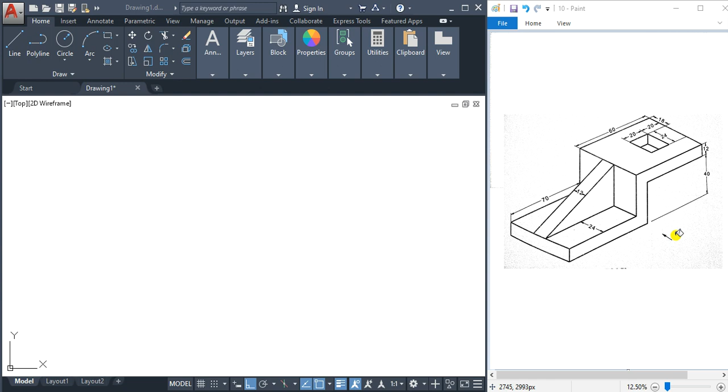Now we have to draw orthographic projections of this object. The arrow indicates the front view direction. So in this direction, the surfaces which are visible are this surface, and also a hole is there, so that hole also we have to represent. In this direction, the hole is there, but it is not visible, so we'll indicate with dotted lines here.

So let us draw the front view of this object.

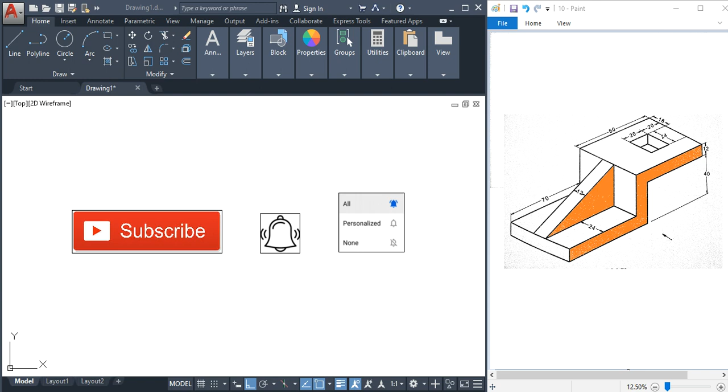Now we'll start by drawing a reference line here. We'll take a reference line of some length, and we'll assume this object is kept some distance from the HP. So we'll take some length, and after that we'll start drawing. So we have to draw this line, of length 70. 70 means from this point to this point, but we are drawing this line. So this line is of length 70 plus this one, so this one will be 12. Why? Because it is given as 12 here, and only one side is given, meaning we have to assume the thickness in the total length, so this will be 12. So 70 plus 12 is 82. This line is of length 82.

And we have to go up in height, given as 40, so we have to go 40, and we have to once again draw this line here. This line length, if you see, is given as 60. 60 means from this point to this point, but we have to draw this line. So from 60, if we remove 12, we'll get 48. So this line will be of length 48.

And here we have to draw 12. You can observe this in the isometric view diagram, and this way directly you can draw 60, and down you have to draw 40. So this is 40 anyway, given as 40, means this is 40. Because if you see, from here to here is 40, so when you remove this 12, it is 28, and once again if you add 12, that is anyway 40. So this will be 40.

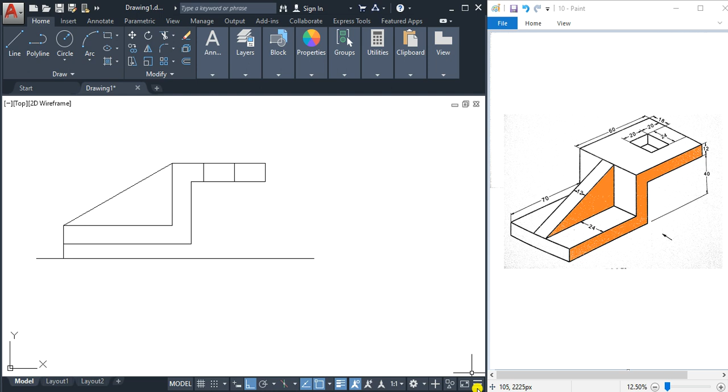Like this we can make dotted lines here, and here we have to draw the top view of this object. If you see the top view direction, the surfaces which are visible are this surface, and this surface, and also this surface. And here we have to indicate this surface, this surface, this surface, and this hole. In this top view direction, you will get one surface like a Z shape. This line we have to indicate at a distance of 12 from this point, as a dotted line.

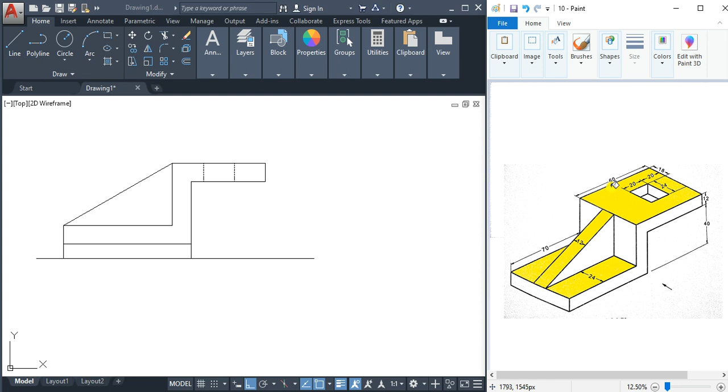So we'll draw the top view of this object. Before drawing, we'll take projection lines from every point up to some length here. After drawing these projection lines, we'll draw first this rectangle.

Like if you see, this will be 60 here. How? It is given as 18 and 24 here, so the remaining will be 18. We have to take it like that, and all together it is 60. So here also it is 60, 70 by 60. First of all this rectangle will be drawn here, and we'll assume this is kept at some distance from the VP also, like we assumed for the front view.

So some distance we can take, and here suppose we are drawing like this 70, first of all we'll draw this one anyway, and this is 60 as we discussed, and you can join directly, or you can draw a line of 70 here, and from there you can directly join.

And we'll draw this one, at a distance of 24, this line. So this line is at a distance of 24 from this line. 24 will be measured here, and from there we'll draw a line parallel with respect to the reference line or base. Second, we'll draw one more line, at 12 distance. So from this point, 12, and we'll draw a line here.

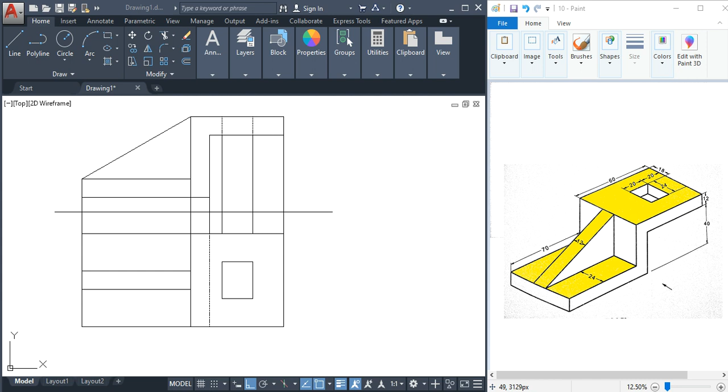Like this we can draw the hole here, and also this dotted line corresponding here, the top view. So we have drawn the top view, and we can darken the lines required. In the drawing sheet we can draw the dark lines with HB pencil directly. Like this we can darken the required lines, and we have to draw the top view of this object.

So the side view of this object we have to draw. This is the side view direction, and this is the left side of the object. So the left side of the object will be on the right side of this front view.

When you see in this direction, the surfaces which are visible are this surface, this surface, this surface, and also this surface once again, and we have to indicate this hole with dotted lines. You will also get one more line here, 12 mm down, so that also we have to indicate like a dotted line here. So that line will coincide here.

So anyway, we'll draw the side view of this object. Before drawing the side view, we'll take one more reference line in the vertical direction, and take some reference line up to some length. From some points we'll take reference lines or projection lines. After taking the projection lines, we'll draw this side view.

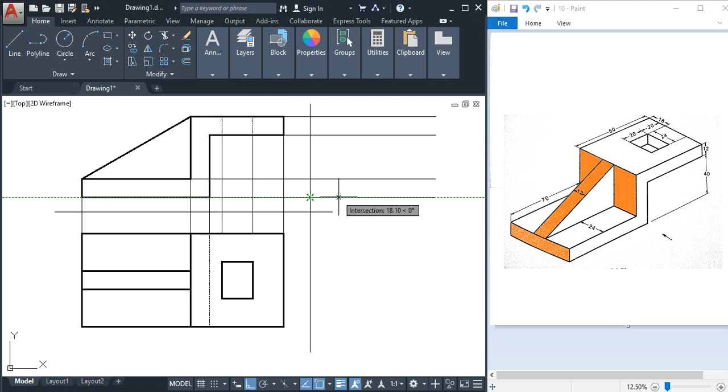This is 60, we have calculated, and this is 12. So 60 by 12, this rectangle will draw. Here also we'll assume some distance from the profile plane, and from that we'll draw a line of length 60 here. We'll measure 60, and go height, or we can directly join here.

We can take this reference and draw a vertical line here. Sorry, we discussed first of all we are drawing only this one, so we'll draw only this one first. From here we'll take some distance, and from that we'll go 60, we'll measure 60, and we'll drop to here only first of all.

This way once again it is 60, we'll directly join here, and after that first of all we'll draw this one, so this is also 60, and directly you can draw the height of this much, and we'll complete this one anyway. To here we'll draw and complete here, so that indicates this one, and no problem, we'll draw this one.

So this surface corresponding to this surface means we have drawn this rectangle, so that rectangle corresponds to this one, and we'll draw this middle one here. To draw that one, if you see, that is at a distance of 24 from this edge point, from the top one. So when you see, from there it is a distance of 24, so we'll take 24 from there.